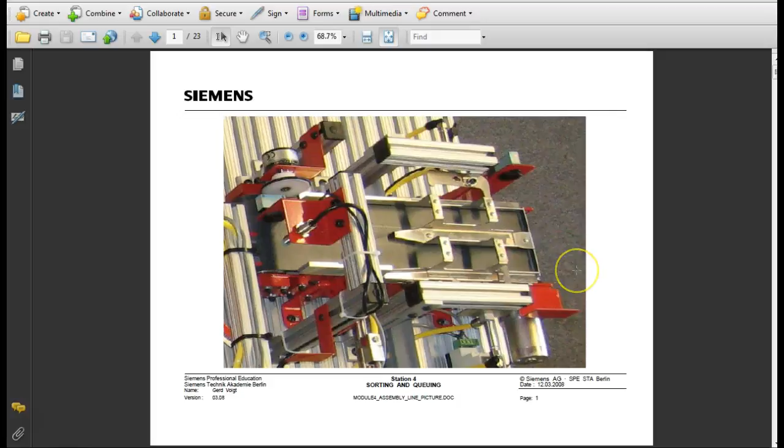Because this line makes a decision, this section makes a decision. So what it does, if it's acrylic, it comes down this line. Y'all can't see me, it comes down this side right here. Where if you're looking from the back, it goes down the right side, and then if it's metal, it comes over here and pushes it over to the left side. So this makes our flow chart, or our function chart, a little different.

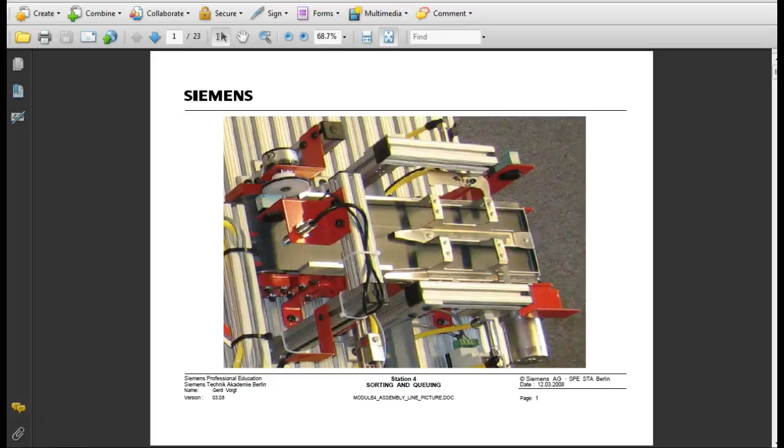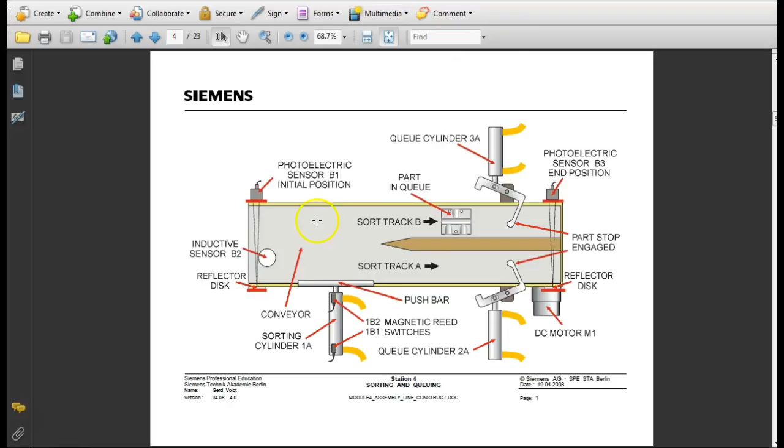So here's all our sensors. Of course, this is the manual that we have. So we have an inductive sensor, and we have a photoelectric sensor, B1. What's B1 doing for us? Yeah, it determines if something's there. And then B2 tells us if it's what? Inductive magnetic metal, yeah, it tells if it's this metal, right?

You understand, this is a retroreflective sensor, so it bounces off, so it's got a retroreflector over here. Then what it does is it starts moving down the line, and then if it's metal, what's going to happen is this guy right here. So 1B1 and 1B2, it says magnetic reed switches, but I've noticed that Siemens makes a few mistakes. We'll look at that. 1B1 and 1B2, these are determining if the sorting cylinder is either extended or retracted.

So if it's metal, what happens is the PLC will cause this to extend out and move it over to this track, or what they're calling track B. If it's acrylic, it just lets it come through. Then what it does, it works off a timer. So there's a timer that comes into play that determines when these guys right here open and close. And so what it'll do, it'll come up here, it'll hit this, and then the belt will keep running. After a certain amount of time, it'll open up and then it'll close. So if there's a block behind it, it will stop it.

We do have a problem with this we might look at, but it was something else. Sometimes this closes a little too late, and what it'll do is it'll grab the whole of the next block. I don't know if y'all noticed it before. I've never seen it on this side, but I've seen it on that side. And then what does this guy right here tell us? B3.

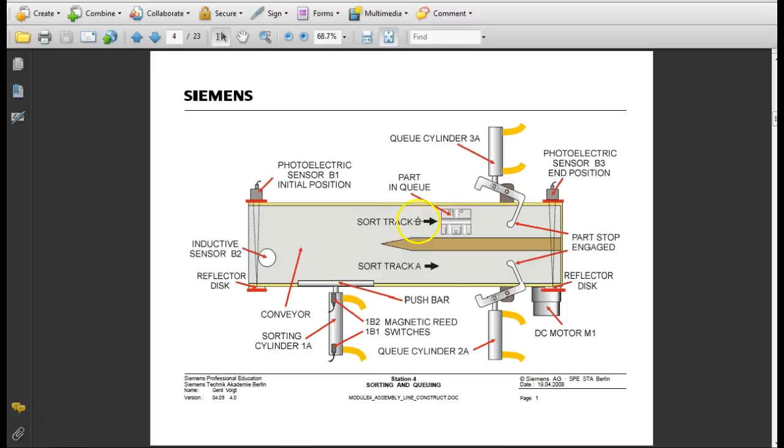So what happens? It's not moving things around. What we don't want to happen is we don't want the belt to run with blocks back in here, because what would happen? Well, some of them would track over and get out of the way. So what's happening is that once this thing gets back into right about here, no matter which block is there, it'll stop all the feeding sections. Everything will just stop until the robot comes up here and picks something up.

Well, when it picks something up, it decrements the count, and then all of a sudden the rest of the line knows it can feed another block. So that answers your question, Jerry? And no, we can't see the number because it's something we don't really need to know. It has a purpose, yes. So it's got two purposes: it lets the conveyor belt know it's through with what it needs to do, and also if it gets full, it'll stop the rest of the line until we clear that out.

So you okay? Are those manufacturing line documents?

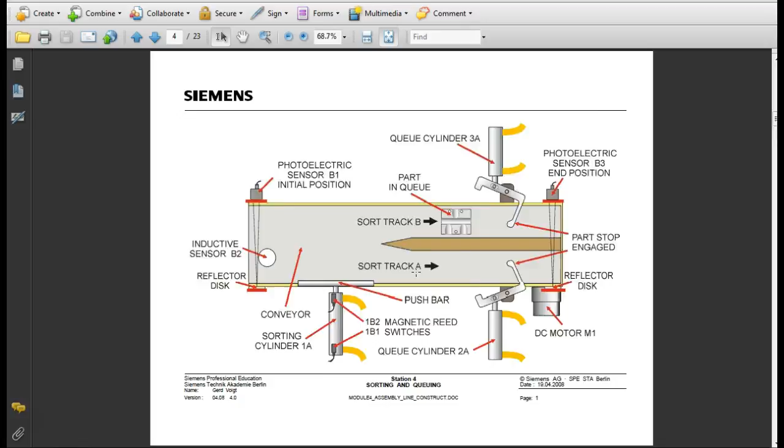Yes, yes, they're on. This is module number 4. Yeah, so this is module number 4, and of course this is standard. And what I've noticed, and I probably need to go back and put notes on that, is...

When we get into the function charts and flow charts, they don't even tell us about these switches right here. The only one they always mention is the start switch. So I was back there trying to figure out which PLC input was good, and then I realized one that was lit all the time wasn't in the documents. When I went back and looked it up, I think it was one of these switches right here - it was the power on switch, which is very, very important. Of course that's pretty obvious because they turn on an LED.

So these are magnetic reed switches. I know they're magnetic because of the little trough thing right there, you understand? So this indicates magnetic, and since it's only got 2 wires coming into it, I know that it's a reed switch. If it had 3, it would be a Hall effect, right? So this is our inductive sensor, this is one of our optical sensors, and this is one of our optical sensors.

These symbols right here should have a slant in the center, because this is the international symbol of a resistor. Normally the resistor, though, the inputs are going in and out. Over here we learn a resistor as that jagged line. The international symbol for a resistor is a rectangle with 2 wires coming in.

The international symbol for a solenoid has to have a what? It needs to have a slanted line right here, indicating that. So that's why we tell it's not a transistor, a resistor. It's obvious it's not a resistor because the leads are coming in on the side. If this was the international symbol for a resistor, of course we know what our symbol is.

But the international symbol for a resistor is, and believe it or not, I like it a lot better, because most people when they try to do this, mine ends up looking like an inductor. The international symbol for a resistor is a rectangle with 2 wires coming in.

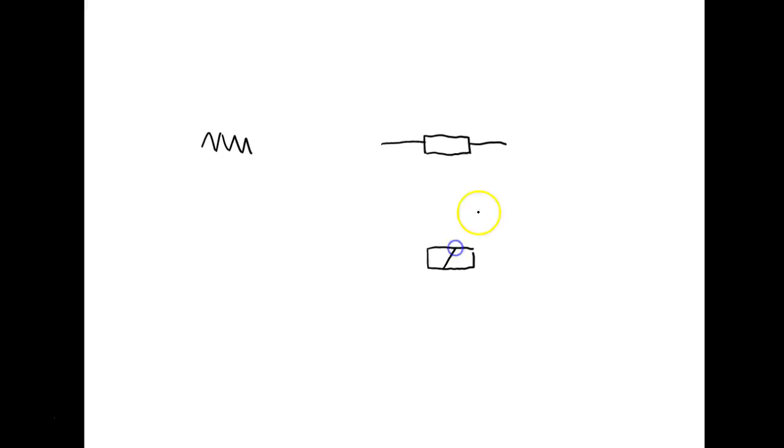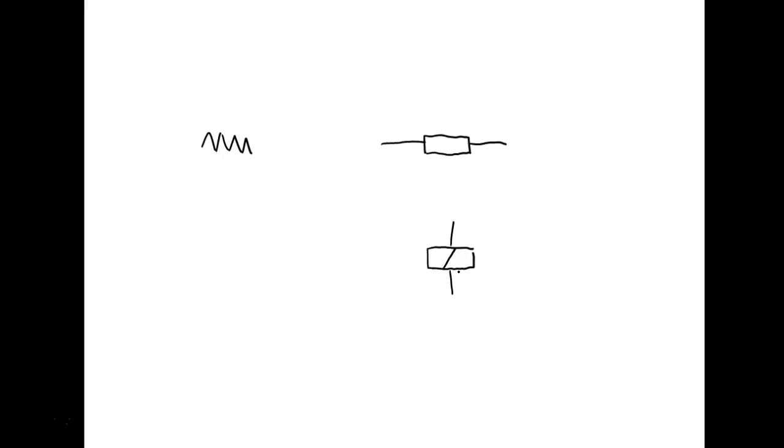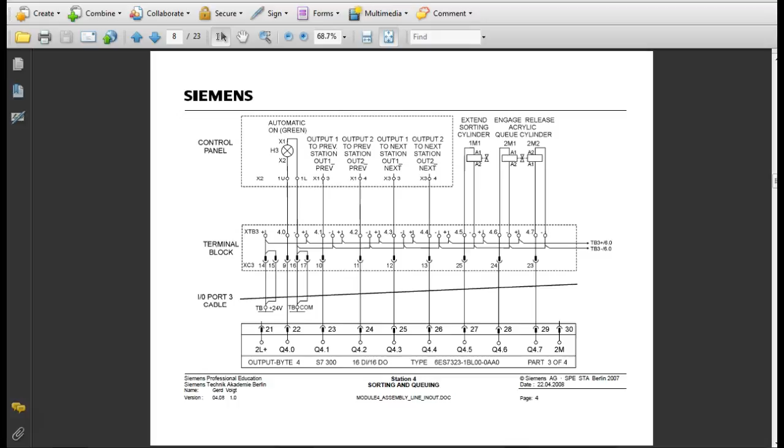But we know it's a solenoid. So this is not the valve. This little rectangle, these 2 little triangles right here, that represents the valve. But this is not the valve, this is the solenoid that controls the valve. Y'all understand that? That's a big mistake people make. They say it controls the direction of the cylinder, but this controls the direction of the valve, and the valve controls the direction of the cylinder.

This is the terminal board layout, and this is a pretty good one. I'm gonna blow this up. So this gives us all the names, and this tells us the designator on the diagram, right? Are you okay there?

Now this tells us that same thing. This is a little better because this not only gives us the symbol or the designator, this also tells us what port on the PLC that these are hooked up to.

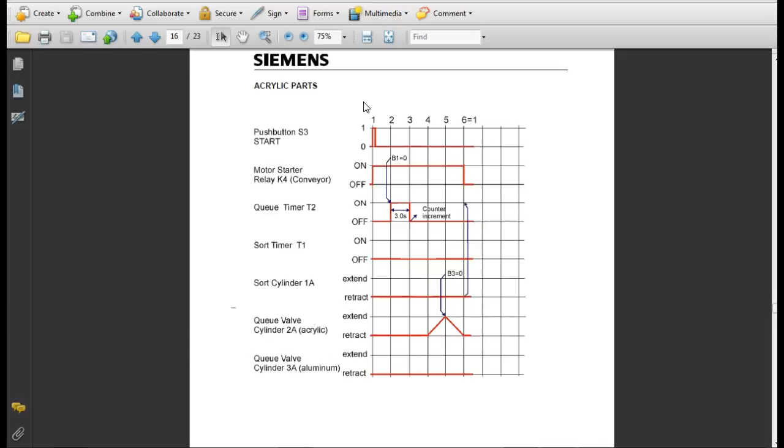And then what I wanted to make sure we looked at, and this is step chart, but I wanted to make sure we looked at the function chart right here. So notice this function chart is a little different than the one that we used to, because of why? It makes a decision. So one route is metal, it goes one way. One route is acrylic, it goes the other. You understand that?

So here's where it says it does what? This increment acrylic, this increment aluminum. That's where the PLC, and once it comes out, when it releases a part, what does it do? Decrement. Does that make sense? This right here is releasing the part, so that's that single acting cylinder that's on the very end. That when it releases it, then it decrements it, right? The problem is that it decrements it no matter what. So if one gets caught, that's the problem we have.

And there's absolutely no sensors on this guy right here, and it's strictly done by a 1 second time delay. It's going to extend the cylinder, then it's going to do what? Retract it, it's going to increment. Says we got aluminum, it's going to release the part. Okay, and then it's going to what?

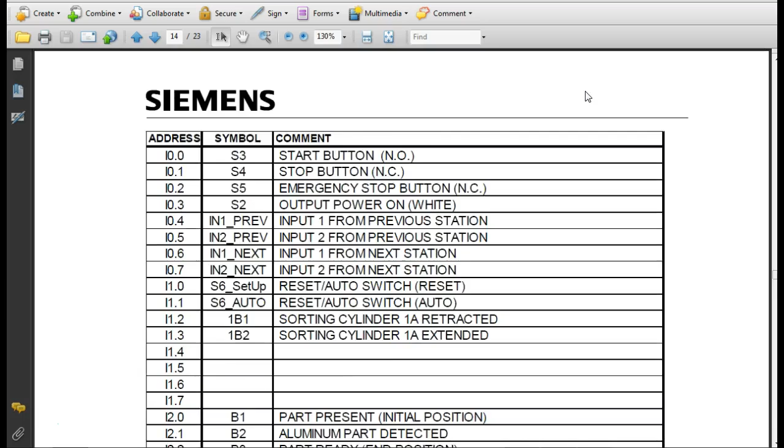No, the function chart don't know that. That's built into the PLC. Now what it might tell us, and that's a good question, Brandy. I didn't look, but back here where it comes up and gives us a function of it when it explains the operation, which I like about this. Most of the stuff I've seen when I've got on, we don't have this right here.

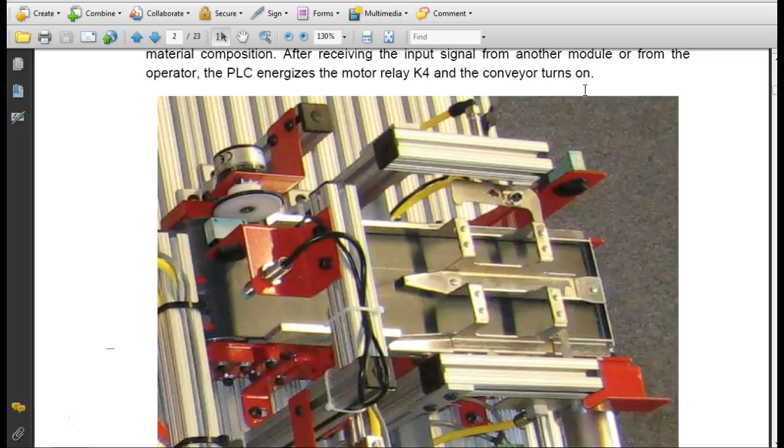So what Siemens has done for us is they've given us basically a detailed operation. Now it might be in that cylinders, but I imagine it might be on the line or 5 or 4 or something like that. We could, when we get it going, that's something we'll do. We'll let it fill up. So we won't start the robot, and we'll just let it fill up and see when it actually stops the rest of the line. So that's a real good question.

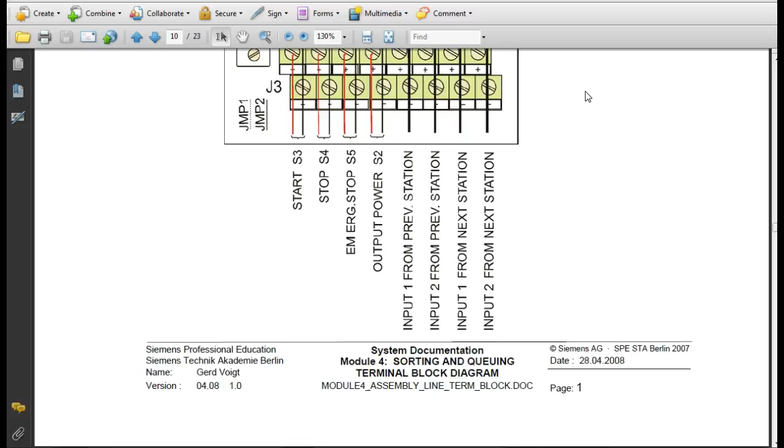And then what we can do, anything that's not documented, once we notice these kind of things, that's something we might come in and add to our document. So at US Steel, we had basically, especially like at number 4 galvanizing line, we had a document case out there where anytime we made a modification, that's one thing we would do. We would document it. If we found something that wasn't on there, we'd document it.

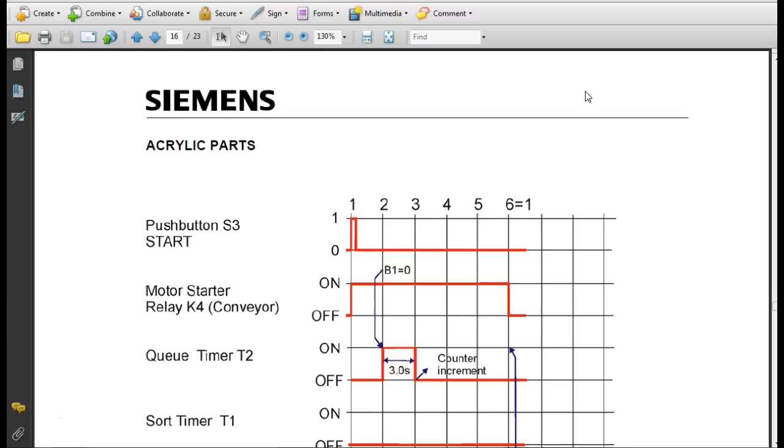The biggest problem though is we had another set back at the shop, and it was up to us to make sure we documented at the shop. Unfortunately, that didn't usually happen. So what you'd end up with is you'd be working back here and you'd try to make a sequence, well, let's try this first, and you'd go up there and you'd see all these notes on the diagram. That's just life.

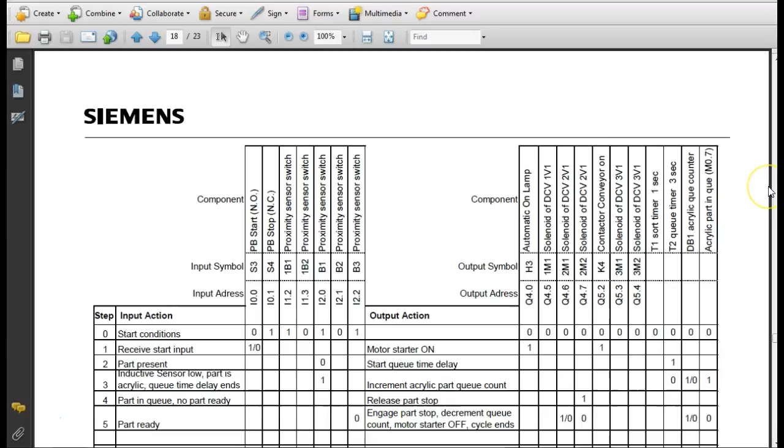Now this chart right here, this is really, really neat for troubleshooting. That's what we found out. Yeah, I really like this chart. This chart right here tells us exactly what we are looking at.

Starting. Remember, receive an input. Once we receive an input, it says this guy here is going to change states, right? You understand that? Then we flow down through here, and it tells us what we're looking at to get this guy here each step. So what happens on these inputs and what should happen on these outputs.

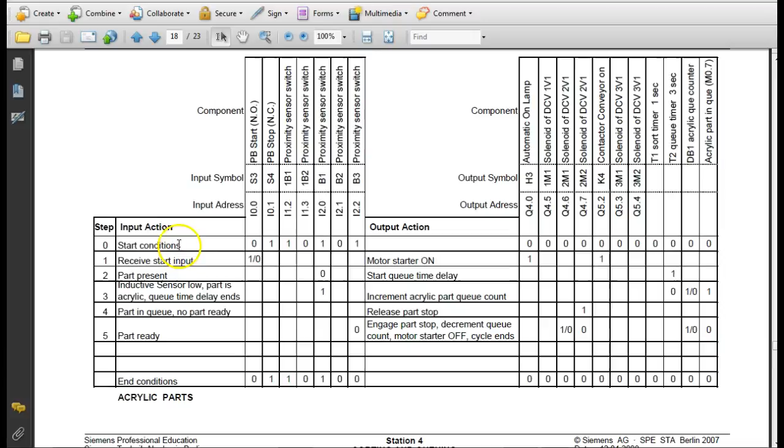I like this one for this condition right here. Normally, for the rest of the conditions, it's easier to see right here. Because here you can say, okay, to get from here to this guy, then B1 has got to be what? It's got to be okay, right? You understand that? So B1, this has got to be true to get down to this next step.

But that startup condition is very, very limited up here because all we got is this little old line that don't really tell us exactly what's required to start it. But when we go down to this guy, it tells us exactly what's required. Sorry, I went too far down to get it to start.

So what we have now over there is we've got a station. We'll have to break it out. By the way, these things are on rollers, so what y'all can do is you might have to disconnect power, but what y'all can do is don't break the other sections apart. Just break it off and roll them out as a unit, right? You understand that? And that will be a lot easier.

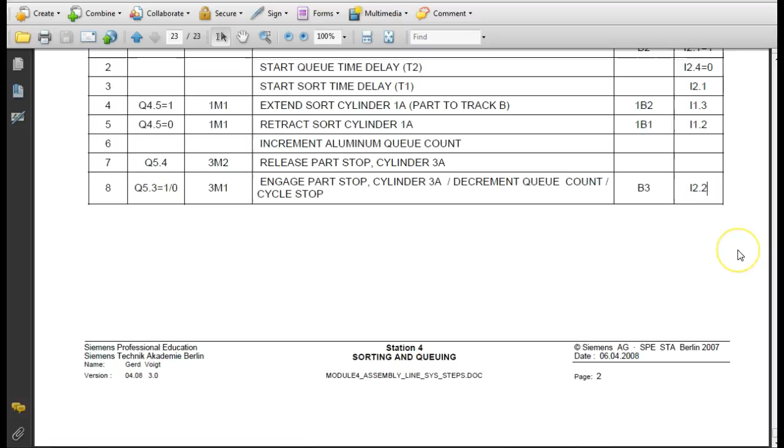You're going to work on this as a class. Because it wouldn't be, and this is a real problem. Like I said, this popped up yesterday when I had my intro to robotics class over here. It popped up yesterday, and now we got a problem. You can see it from over here, right?

So we need to write the gripe up. I guess the gripe will be module 4 will not reset.